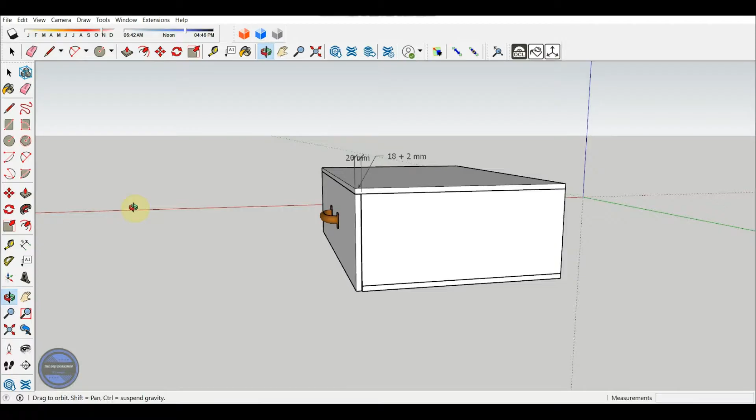The first one: when designing the project, we need to leave a 2 mm space between the door and the furniture body. This distance is absolutely necessary for activating the mechanism.

The second piece of information worth noting before starting the installation of these systems is that any of the 5 models presented in this tutorial can be adjusted, which helps us a lot in the final alignment of the fronts.

The third item on the list is something that very few people know, including professionals. Push opening systems are divided into 2 categories, some with a metal plate and others without a metal plate, for example Hafele and Titus. If you choose the version with a metal plate, it is good to know that in this case it is recommended to use hinges without a spring.

On the left side we have the classic hinges with normal closing, and on the right side we have the hinges without a spring, meaning without a closing system, as clearly seen in the video clip. Now let's see the differences in operation between these 2 types.

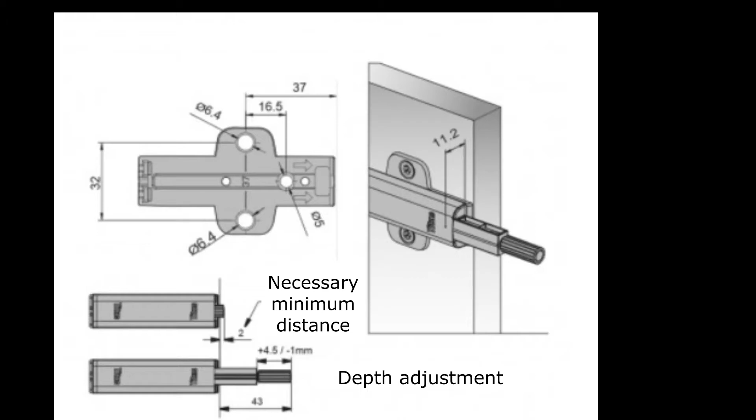The door will stay closed since the closing system using spring hinges is missing. I believe the no-name system works very well. We continue the nice presentation with the product from Titus. As you can see, it is very easy to install with the help of two countersunk screws fixed at 37 mm from the edge of the cabinet.

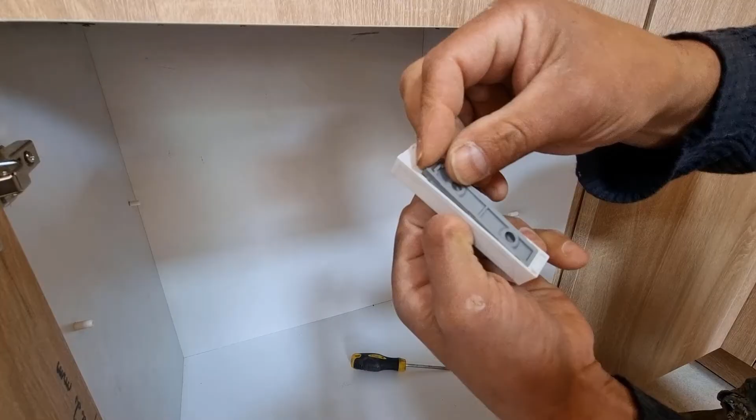Due to its slim construction compared to other products in its range, the push to open from Titus is a good option for drawer opening as well. At number 4 on the list we have the Blum tip-on, the short version with a housing. Here we have the installation diagram provided by the manufacturer.

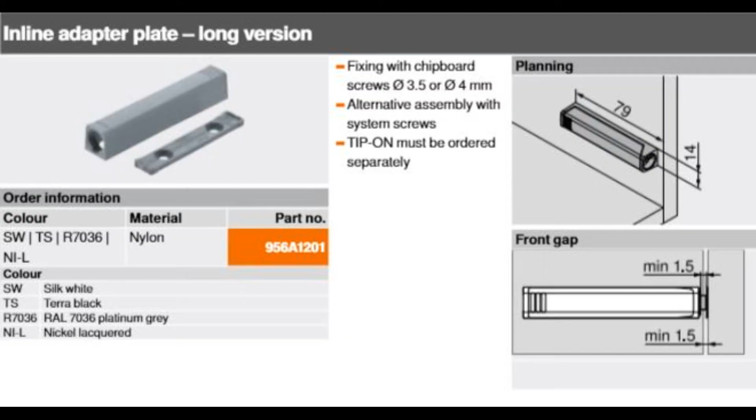We insert two screws, also 3.5 by 16. We insert the housing by snapping it in and the pushing system, the short version. This time the metal plate has a double-sided adhesive tape included on its back, which is used for sticking it to the front or door. We press firmly on the door to ensure the adhesive bonding.

This is the opening angle if we use the short version from Blum. Fortunately, we also have the long tip-on version available to make a comparison. It is clearly visible that the door's opening angle is more generous.